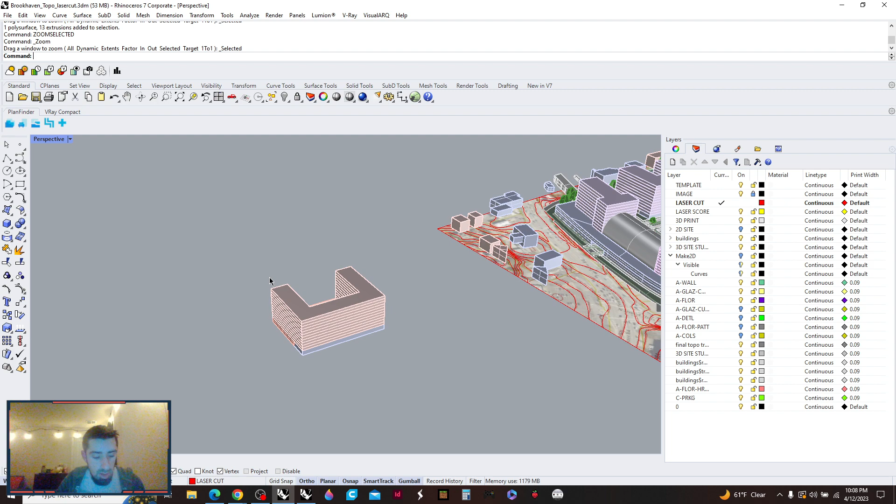First things first, we need to open up our Rhino file. I have a project I've been working on for studio this semester, and we're just going to use that. So we have this volume here, this project I'm working on. Let's say I want to 3D print one of these volumes. What we're going to do is copy it over and bring it here. Something people don't quite understand about 3D printing is that printers can't print on thin air.

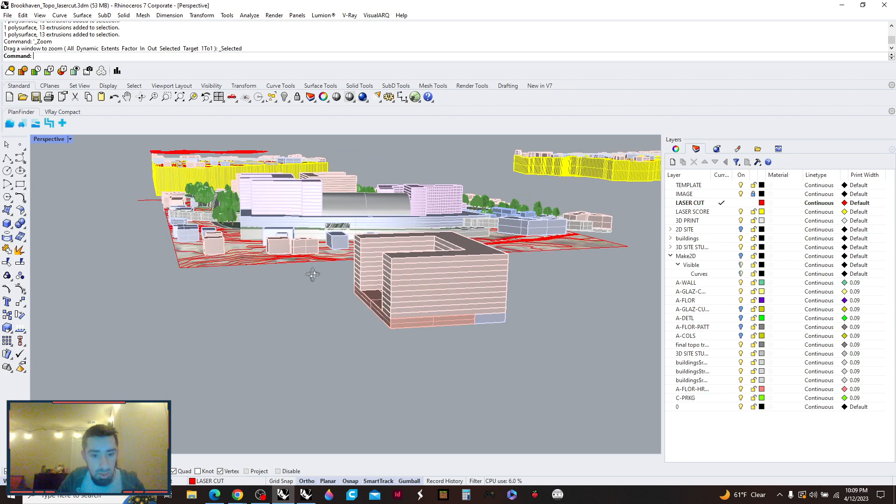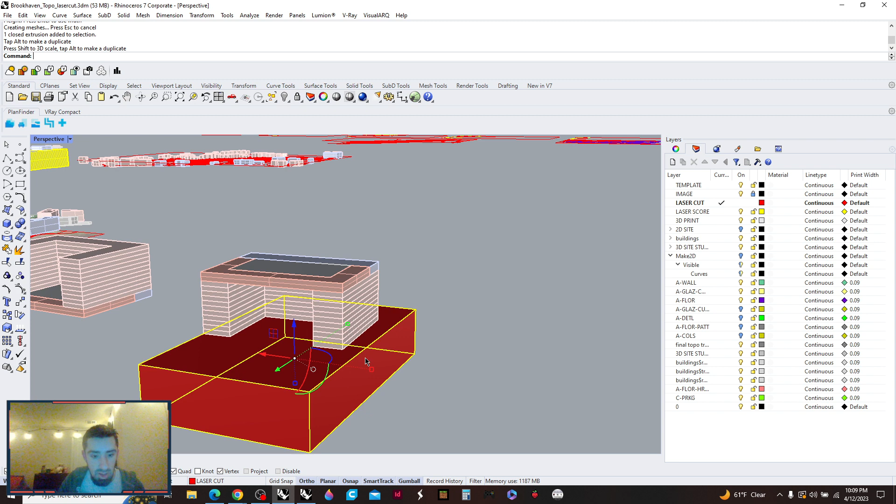As an example, say we copy this and rotate it real quick. Say we try to print it like this, with the print bed starting below this object. This would be a terrible way to print, because the 3D printer would start on the bottom layer, then have to print this top portion here, filling in a bunch of supports on the inside all the way up to the top, and then you'd have to take the supports out. Now the good thing is, supports you can take out fairly easily.

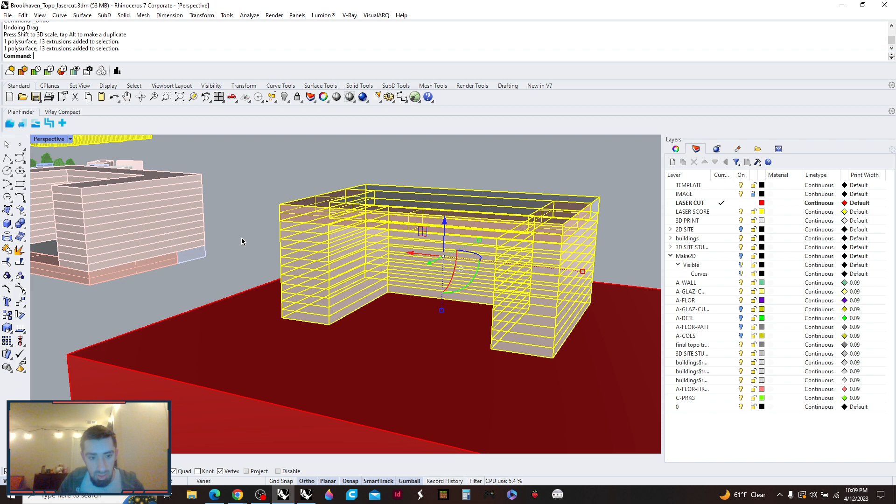The supports will be generated once we bring it into Cura, the slicer program. Most of the time, 9 times out of 10, you'll have supports in your project, but the idea is to get rid of or minimize the amount of supports in your model. So printing an object like this would be terrible, printing an object like this would be great.

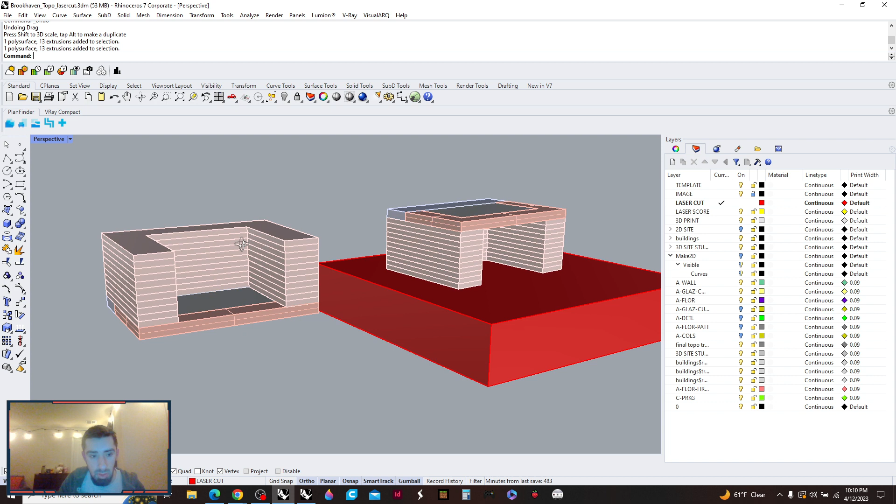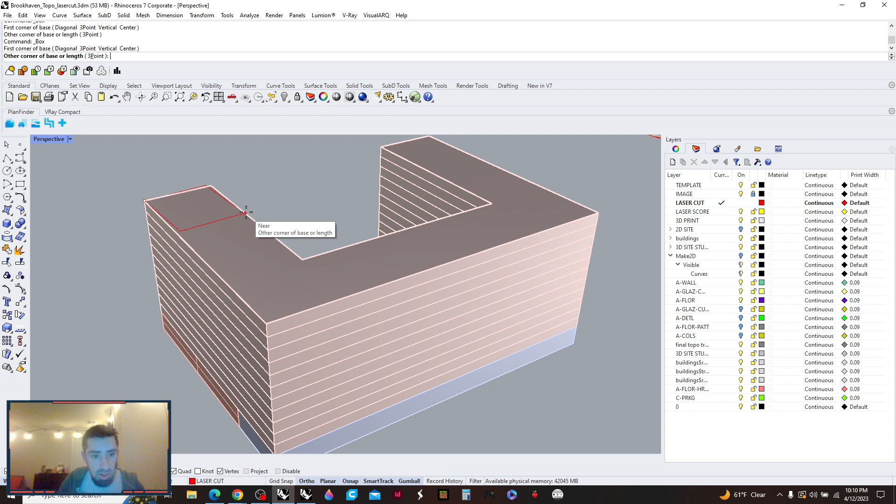The main reason this would be fantastic is because, believe it or not, this object wouldn't need supports at all. Now, it probably would need supports if we made a hole through this object and had a window or something going through it. So for this exercise, we'll go ahead and make a hole real quick, so I can show you guys what those supports would potentially look like inside of Cura.

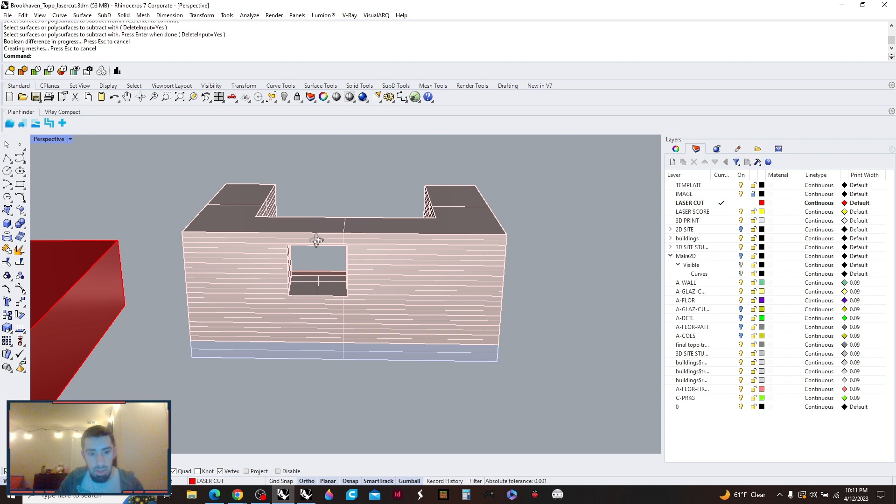So let's do this, and that's grouped, so we'll ungroup it. Then we'll make a hole. Now that we have our hole here, this could be treated as something that would need supports, like a window in our building.

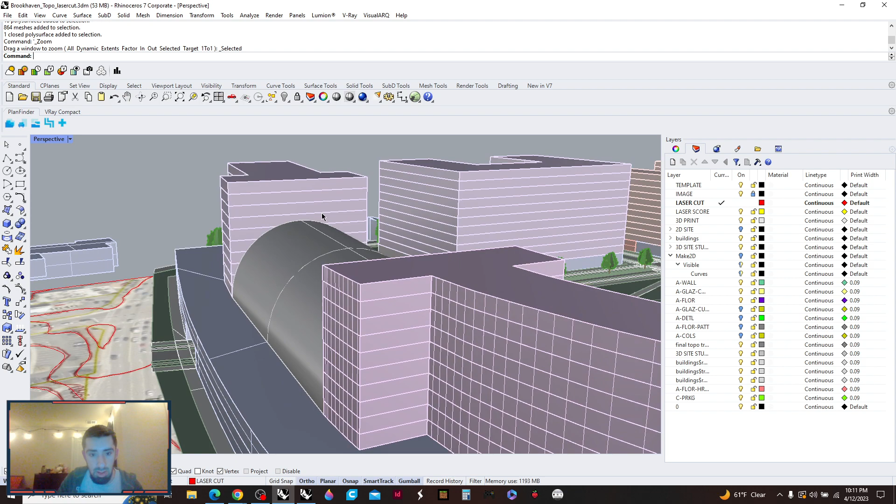Now, instead of printing your building at once, it might be smart to print it in multiple sections instead of all at once. For this exercise, for Decom 1, you guys all need to print one specific component of your building, which is the outer shell. So you don't have to worry about splitting your things up into multiple sections.

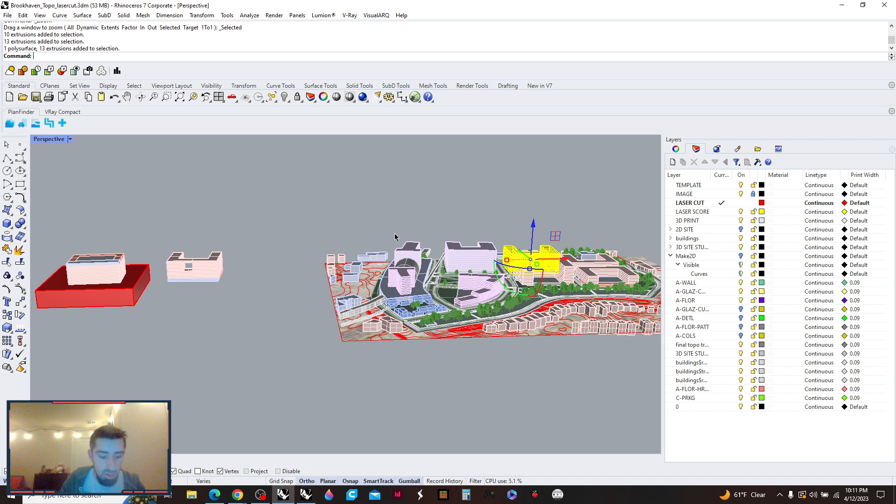The idea, however, would be to first start off with your original copy of your building, copying it over, and turning layers on and off depending on what you're going to actually use for 3D printing, or what you're going to use to laser cut, or for essentially any of your materials. So once again, say that was your original thing you wanted to completely make, then we would bring it over here and copy it.

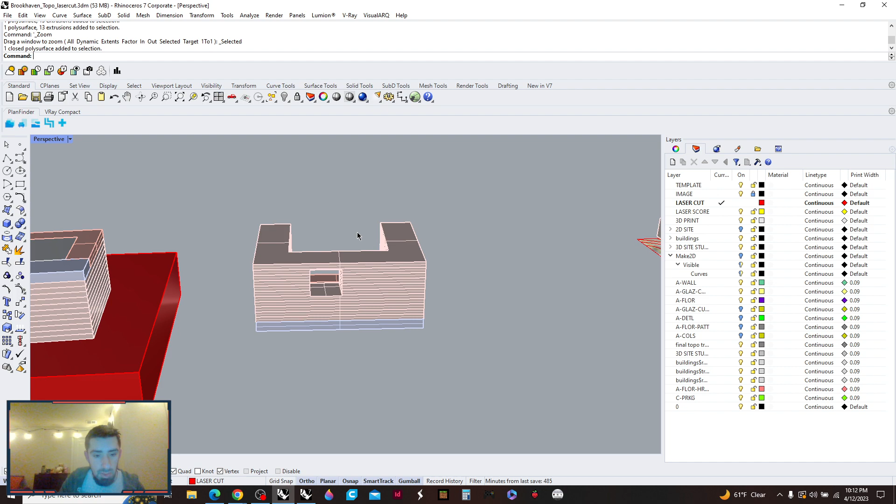Well, this version, we'd copy it, and then you turn off any of the layers you don't want. So for example, a lot of you guys have furniture, so you would turn off your furniture layer before copying it. Essentially what you would do is bring it over here and start working on the things that needed to be printed and the things that would be laser cut, and vice versa.

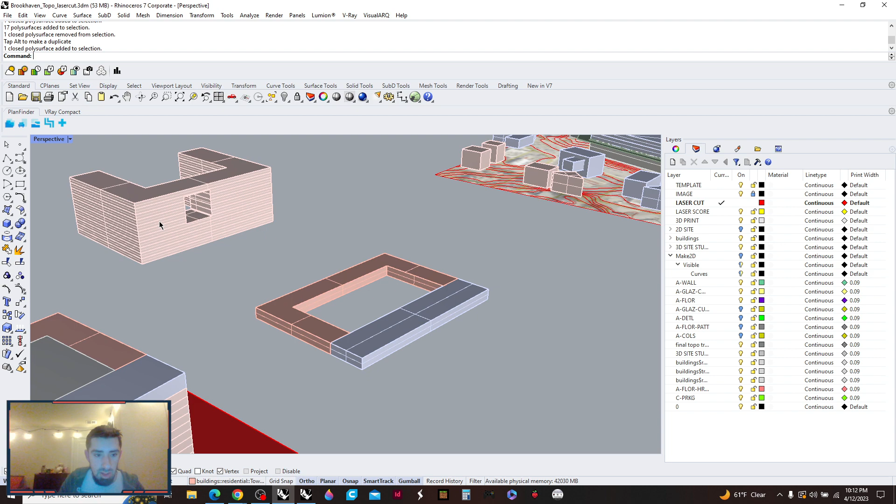So let's say we wanted to 3D print this section, but not the bottom. Then we would essentially just move this over. This portion would be 3D printed. Oh, that should be solid on the inside. Oh, there it is. Yep, accidentally moved it over.

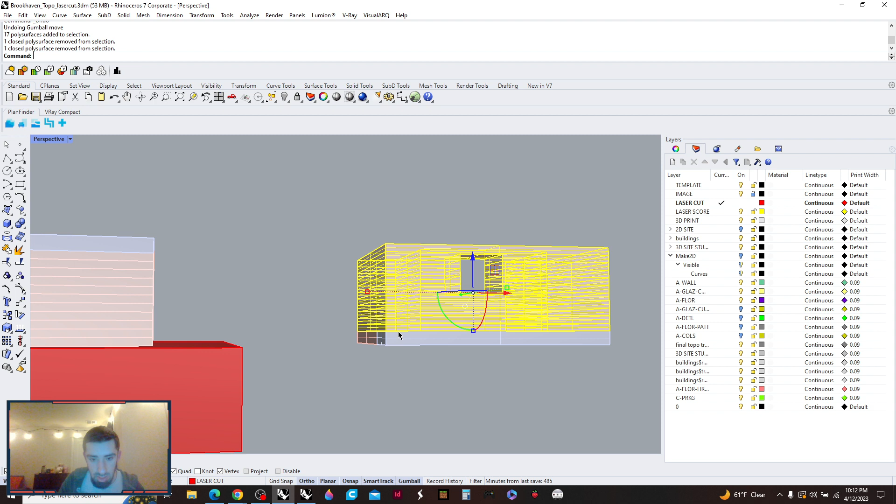So this portion, we could say, would be 3D printed, and then this portion we could say would be laser cut. Laser cutting we'll go over at a later date. So you would split it up into multiple chunks.

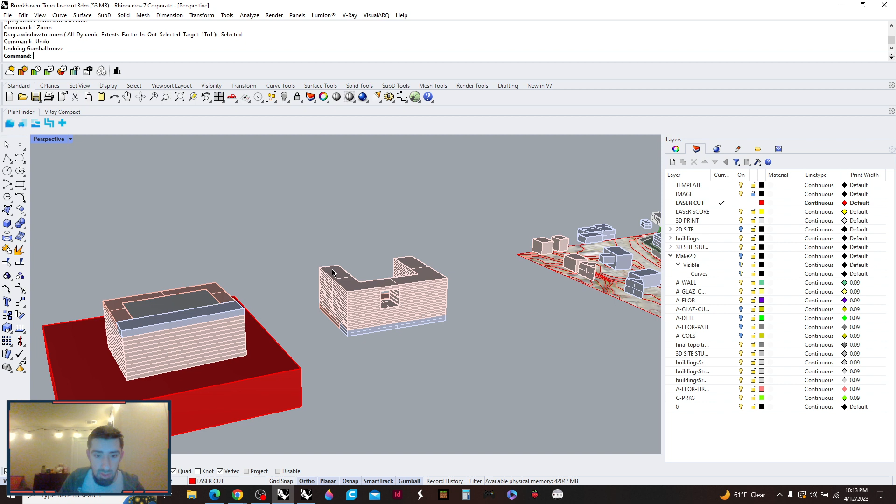So it's almost like you're making a list or a set of parts and an assembly kit, just pulling out things from your original model. So never actually move them—I would always just copy them, so you know what you've done already. So for this, we would copy this over, and that'd be, okay, great, that's going to be 3D printed.

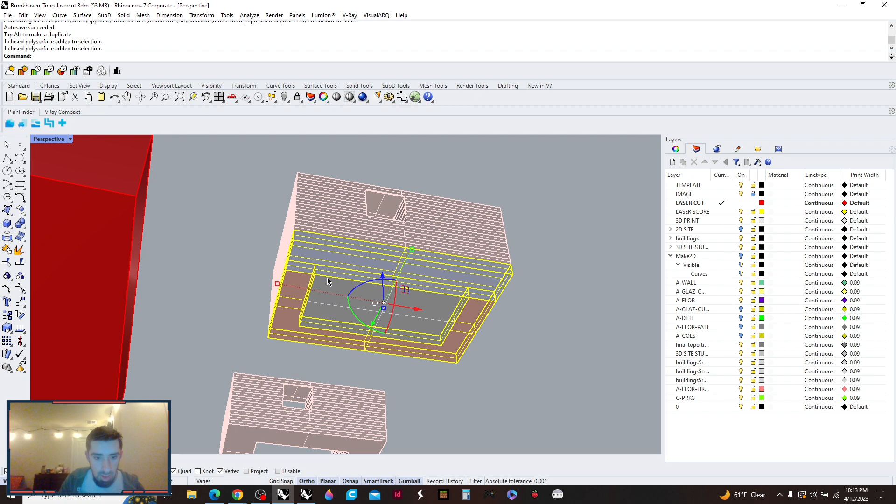And then you would do the same thing here, and we'd say okay, this is probably going to be laser cut. So you move that over there, and that would be laser cut. So then you'd prep this one for laser cutting and this one for 3D printing.

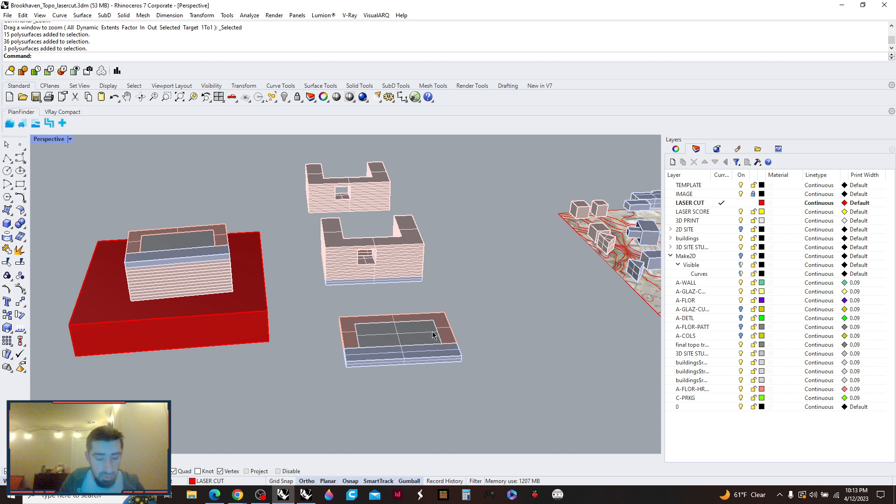So now, say you get all of this stuff ready—say you get this ready for laser cutting specifically. Now the next step would be to highlight each of your components that you would want, including your stuff that you're going to laser cut, and we need to scale it down to size.

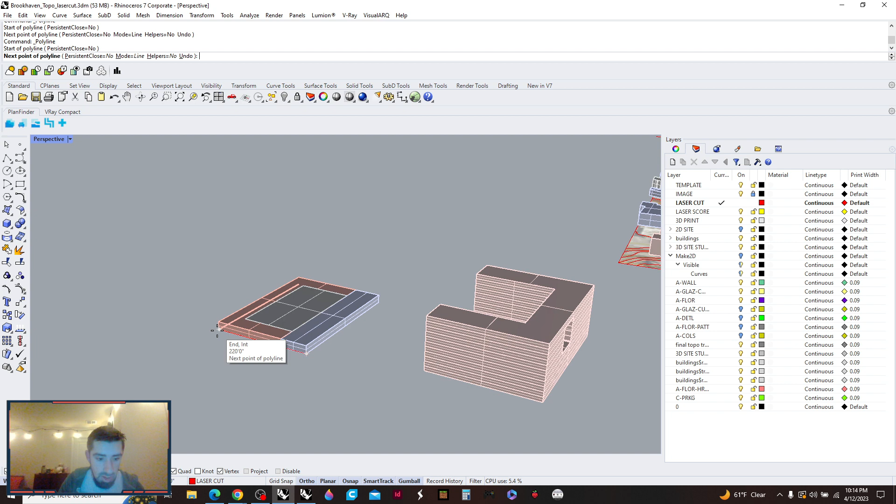Now this is 1-to-1 scale currently—see, it's in feet. So if we highlight this, this is however big my building is. I think it's like 300 feet by 220. So obviously you can't really print that.

So we're going to go to a top view, and then we're going to make a box, and make it 9 inches by 9 inches. It's all the way down there, really really tiny, so the easiest way to find it is to just highlight it.

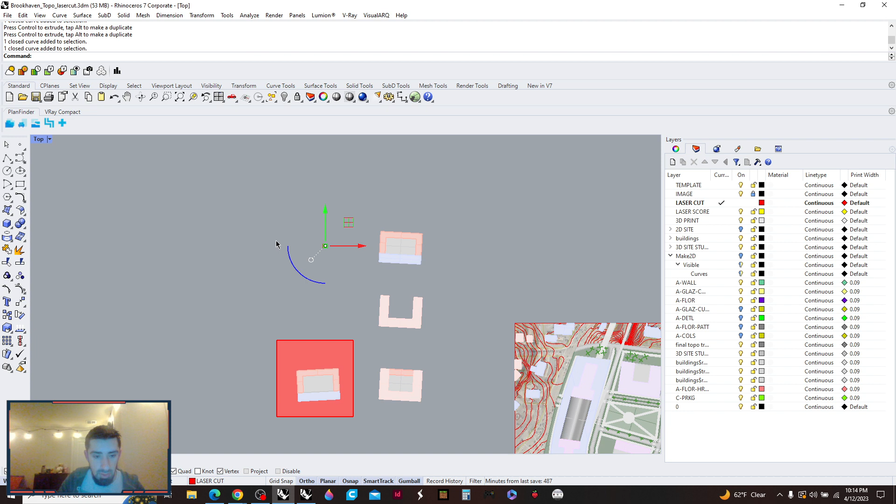And then we could do zoom selected, and now we're zoomed into it. So what we want to do next is make sure that these components are scaled down and can fit inside of this red box.

Now, I don't mean both of these components—I just want to make sure that at least the building fits, because this is the footprint of the building. So if this fits in, then that means this will also.

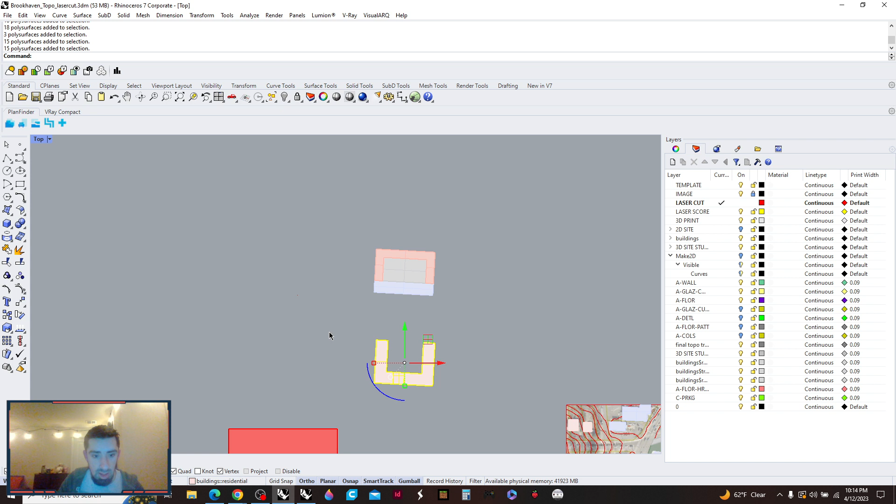So we're going to highlight this, type in scale. Now, the nice thing for this project is we don't need an actual scale—it can be kind of arbitrary. So we're just going to scale it down. It asks base point, enter for automatic.

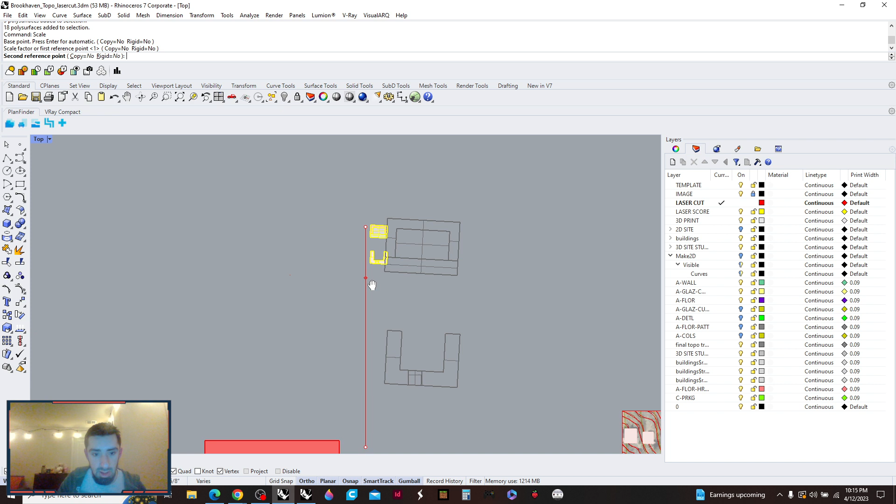We'll just click our base point here. Now, when it asks for a scale factor, basically we're just going to choose the length of the building, or just something longer than that, and we'll slowly drag it down essentially until it gets pretty dang tiny. So we have that, and now we have our plate over here.

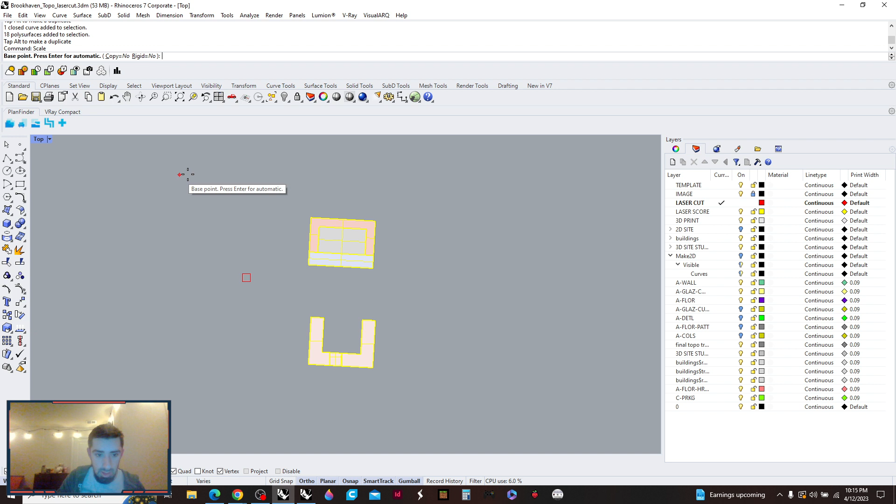So now you want to start moving this over using the gumball down to here. Look how much smaller that is now next to our base. So same thing, we'll scale it down again—keep scaling it, keep scaling it.

And the reason why we're doing 9 by 9 inches is because that's about the size of the bed plates for the laser cutter to handle. Now, on a typical exercise like this, if you were making this for a different studio project or something, you'd probably do an actual scale. So you would highlight this.

If it was the original scale, you'd type in scale, then choose the objects and choose a scale factor to scale from, like 1/32, 1/16, 1/64, anything like that essentially.

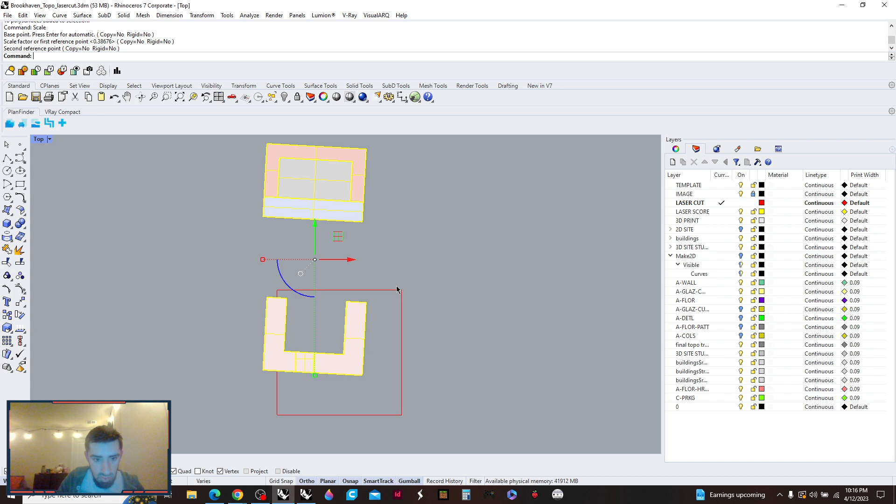So next up, what we're going to do is move this into here, and because we want to really make the most out of our model, we're probably going to scale it up a little bit to get it to fit nicely within that 9 by 9. So we have this.

So it looks like this actually isn't square perfectly. So what we're going to do next is actually rotate it. I'm going to move this over, and then I'm going to rotate it.

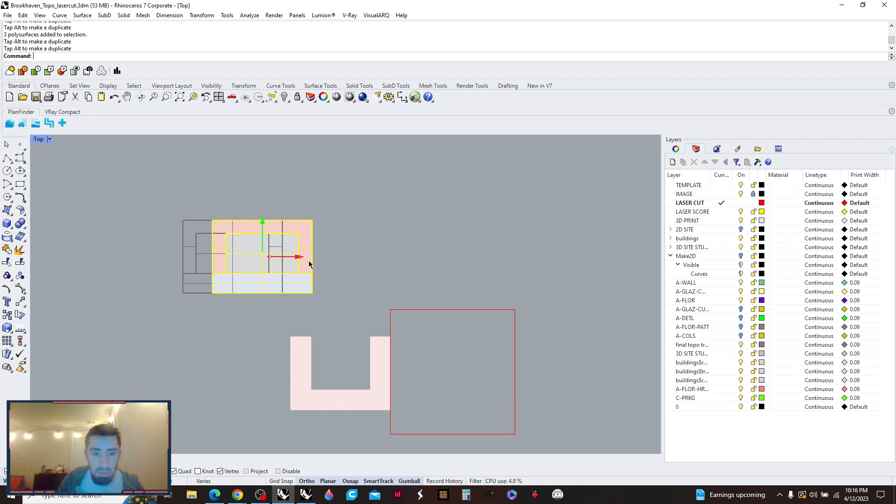The reason you'll probably want it to line up is the way the filament works. Think of it like a basic printer. Printers print things top to bottom, from the start of the page — you see the ink slowly printing out line by line. That's what 3D printers do, they print line by line. So since it's in a grid, it'd be best for your filament lines to all line up top to bottom and left to right, so everything's parallel with each other.

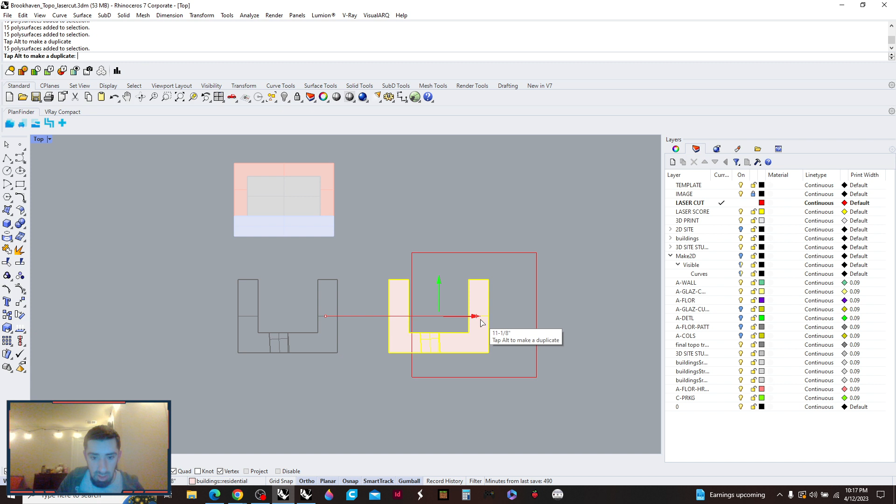So now that we have this, and this looks like a decent size, the next thing we're going to have to do is change this. Now we need to change our units, so we're going to right click on feet and go to unit settings, and change this from feet to millimeters.

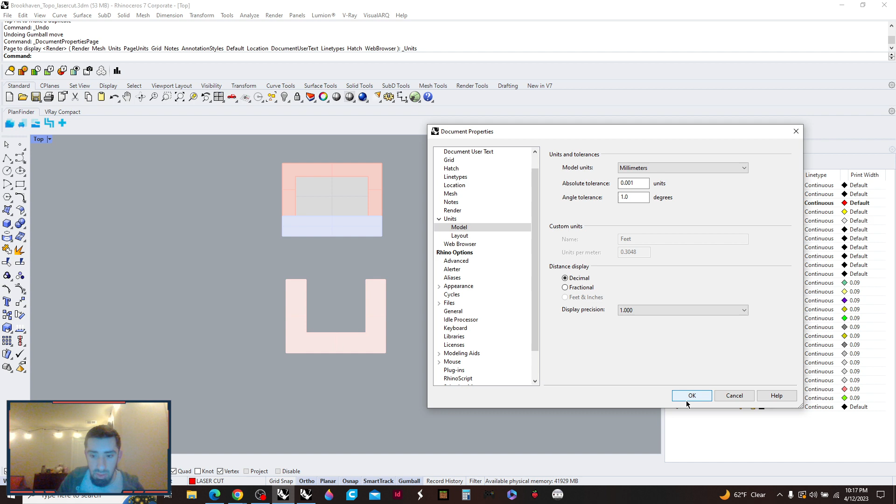The reason why is Cura, the slicer, only recognizes your model in millimeters for some reason. It's going to ask you to scale the model. We're going to click yes, just give it a second.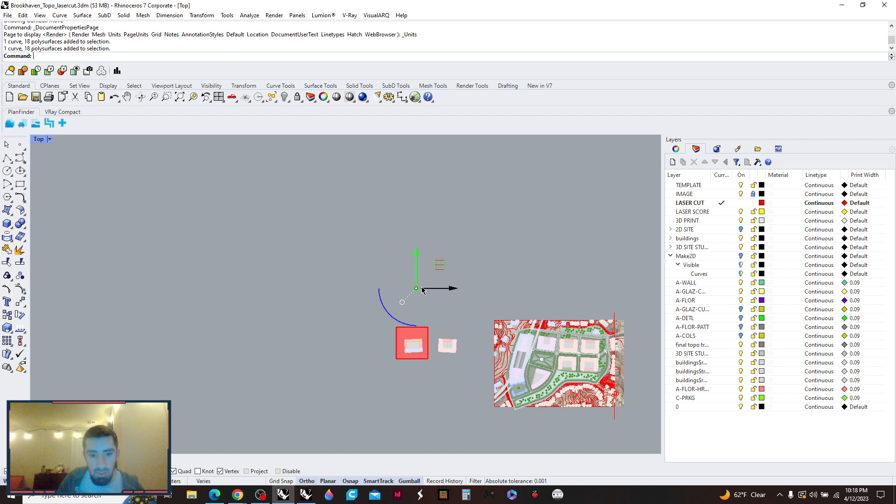Unfortunately it disappears sometimes, so we'll have to zoom it out. And there it is. An easier way to do that so it doesn't disappear is to keep your object selected before or after clicking the scale button — that way if you click zoom selected, it'll go right to it. So here it is in millimeters.

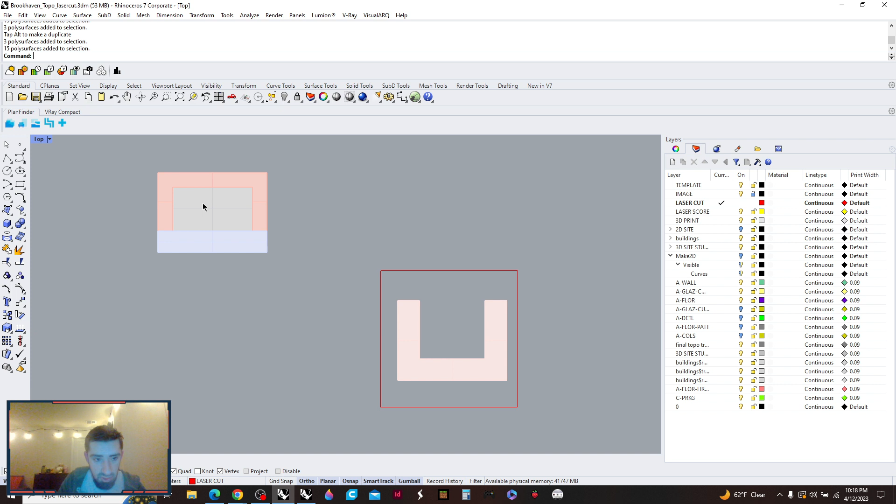So we're going to move this over here, and this is the portion we want to laser cut. We're not going to worry about this, but the good part is, since we want to make that for laser cutting, this and this are the same scale now, which means once we start assembling the laser cut portion of our model, it will be the same size as the 3D printed portion.

So make sure when you scale objects down for your model when assembling it, that it's all the same size. You don't want to scale one object down first that you're going to 3D print, and then later scale the part you're going to laser cut, because that would probably mess you up, honestly.

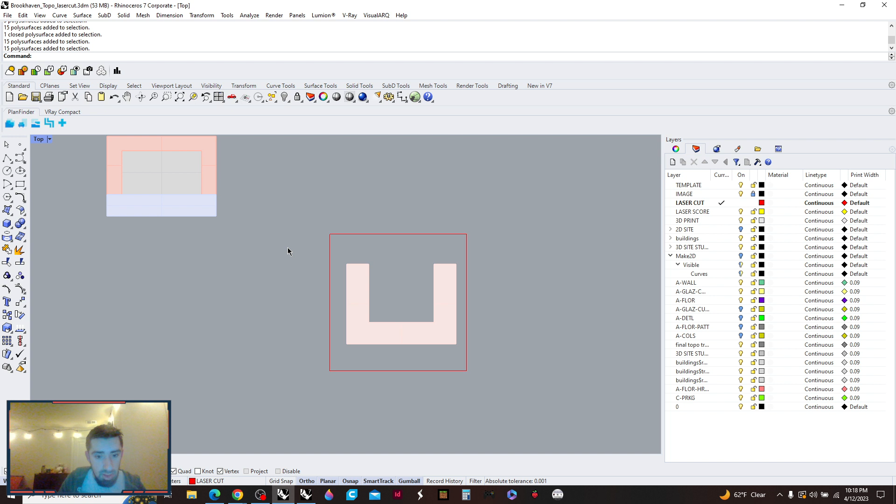So next up, what we're going to do is export this into something that Cura, the slicer we'll get into in a bit, will recognize. We're going to highlight this, not the line, since that was just used as a template for us, so we don't have to worry about it. We're going to type in export.

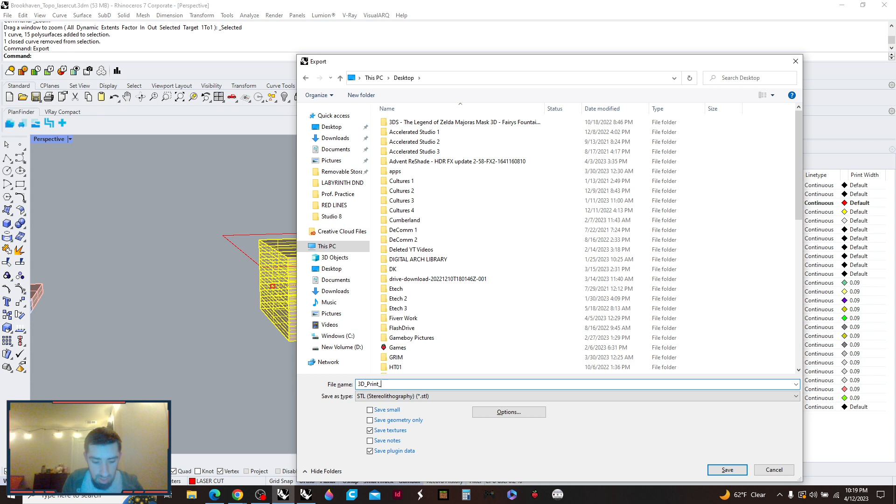Now it's going to ask you to export stuff down here — Rhino 7 3D model, 3DM. We don't want that; we want the file called STL, which is basically what Cura recognizes. I'm going to just save it to the desktop, and we'll call it test, or 3D print test. So we'll save that, then click save.

Now it's going to ask us here — it says the maximum distance between the original surface or solid and the polygon mesh created. Typically I just leave this alone; essentially that just means the amount of tolerance and things like that. We're just going to click OK. There's an option here between binary and ASCII — I don't know what the difference is, but typically binary is fine.

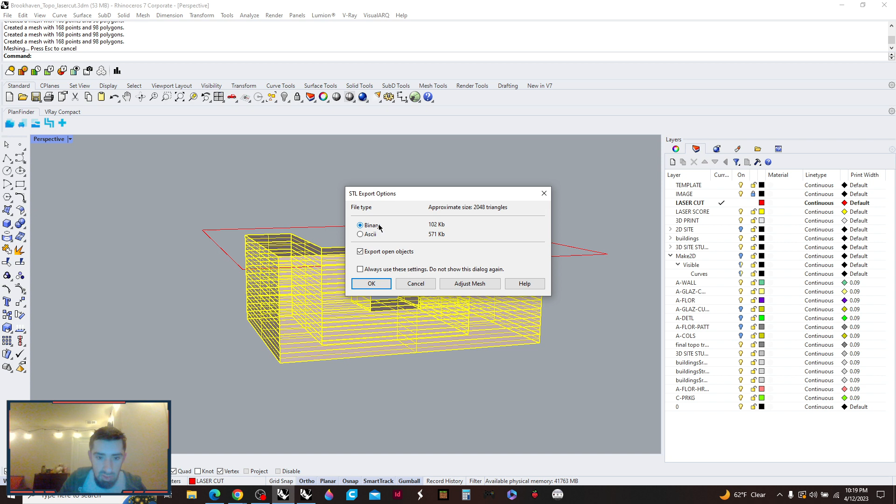Leave this as just whatever the typical is, and then we'll click OK. It saves really quick. It says file successfully saved as, and shows where it's saved.

Next we're going to go get the object. I'm going to highlight this, Control C, open up File Explorer, paste it into the command bar, show the desktop, and there it is. The cool thing is it's actually already recognizing it as something by Cura, so when I copy it into the command bar, believe it or not, it's going to open it up in Cura. And here it is right here, which is awesome.

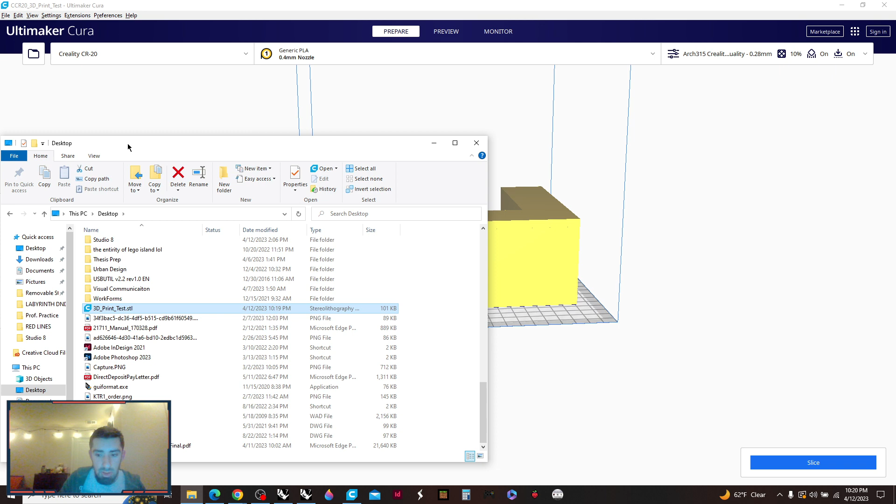Now for those of you that don't have these files automatically recognized by Cura, I'll show you what that'll look like. Say you have Cura just open, you'd go to open it first. Then you'd go to File Explorer, and we can just drag and drop it like so.

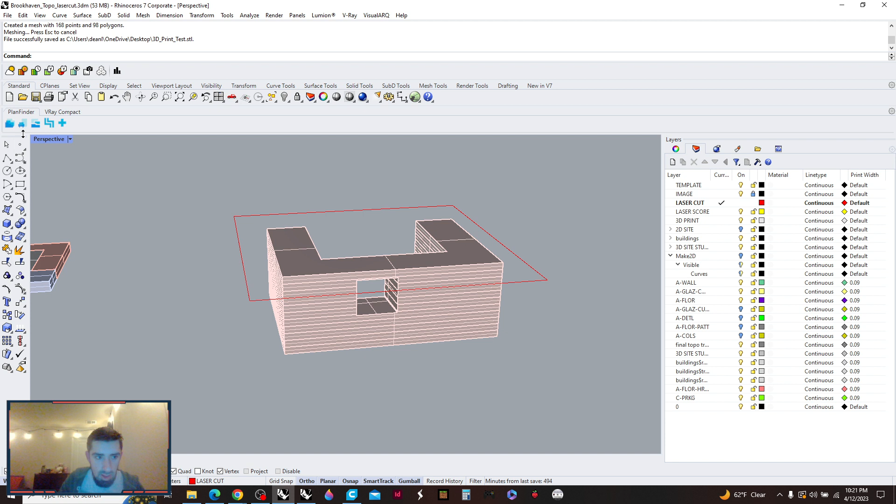And there we go. If we compare it to our Rhino file, we'll go ahead and look at it from a top-down view. It is the same exact size as the one from Cura, which is great, which means it's scaled properly.

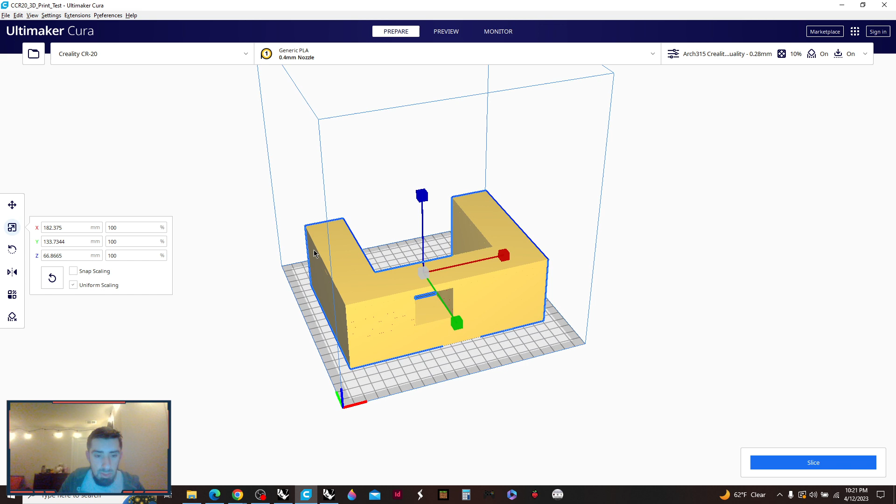Another way to tell is if you click on the object and go over to where it says scale, as long as it says 100%, that means your object hasn't changed whatsoever. Sometimes Cura will actually change the size of the object, and you need to be really careful of that, because if it's scaled to a different size than what you're laser cutting, your whole model is going to be screwed up, and you don't want that to happen.

So next up, we're going to go to our basic settings. Now, this is the part where if you don't have Cura currently installed yet and you didn't follow the instructions I showed at the beginning of this video, you're probably going to want to pause and do that, because these settings and presets won't actually appear for you until you do that on their website. So make sure you get that done first.

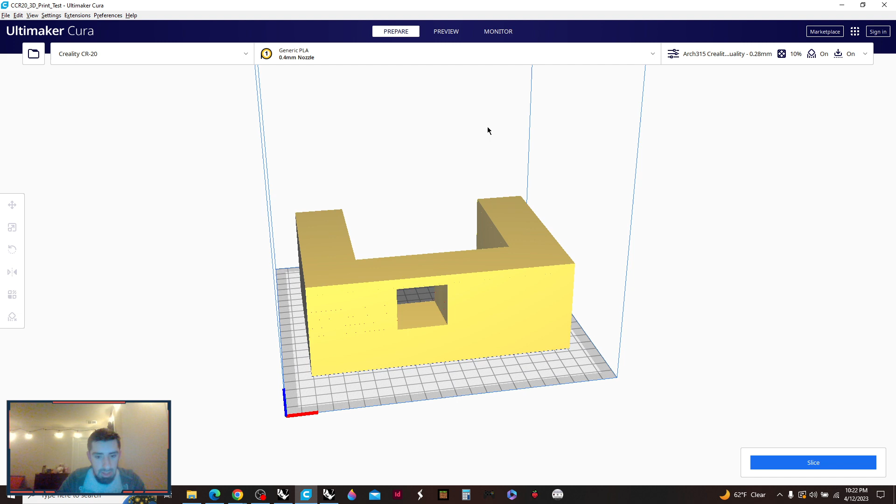Assuming you have that done, we're going to click on this one right here, which is Creality CR20. These two you probably won't see — those are my personal printers — but you'll see either this one or the Ultimaker S3. Typically we can leave it on the Crealities because that's the most amount of printers the school has. I think they have like 10, a decent amount of them, so that's the one we'll leave it on.

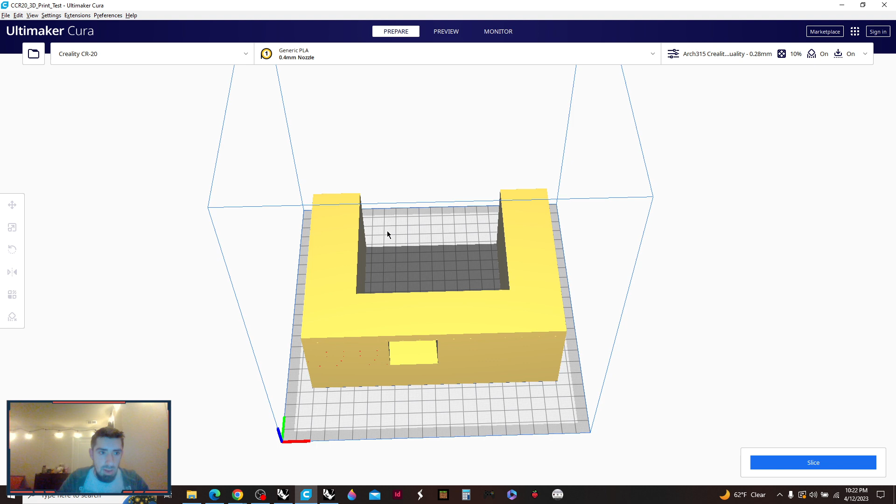Next we'll go over to here. You don't need to look at any of that stuff because that's all your detailed stuff. Typically we can look at just the default. So if we go to... actually, no, we do need to look at that, my bad.

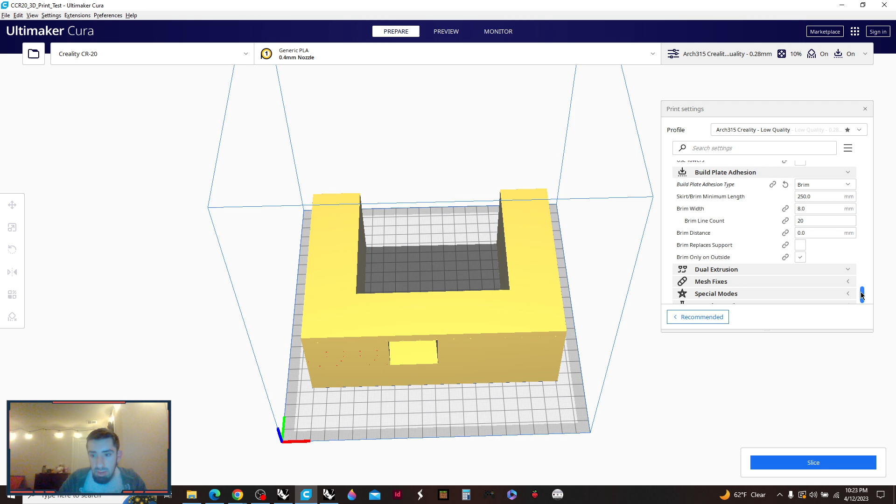So if we click this over here, these are our presets, and then we go to custom, and see where it says profile. If we click on this, there are 3 different profiles that the school has set up: standard quality, high quality, and low quality. They've already changed all these presets if we scroll through, and you aren't typically going to want to change these at all, unless you have a massive print like this — then you might want to change stuff like this, and I'll explain a bit of that to help you out in the future.

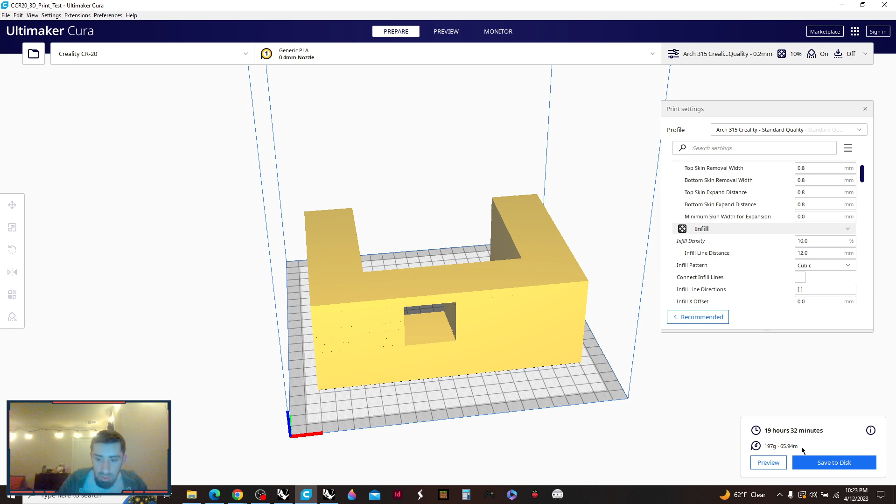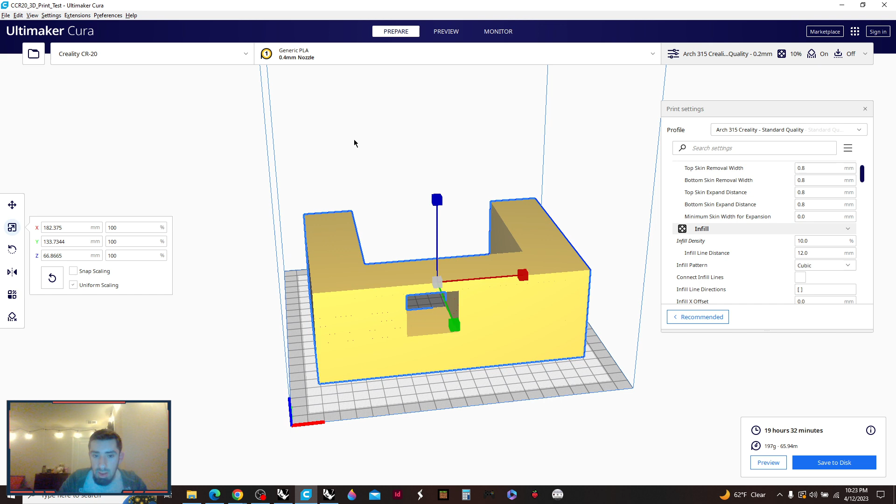Before we do that, we can start tweaking settings depending on what we're fine with. So the first thing we're going to do is go to preview at the top. Preview will show you exactly where different things are going to be, and it color codes it. I forgot what the color code is off the top of my head, but I know the blue represents the portion the printer starts out with.

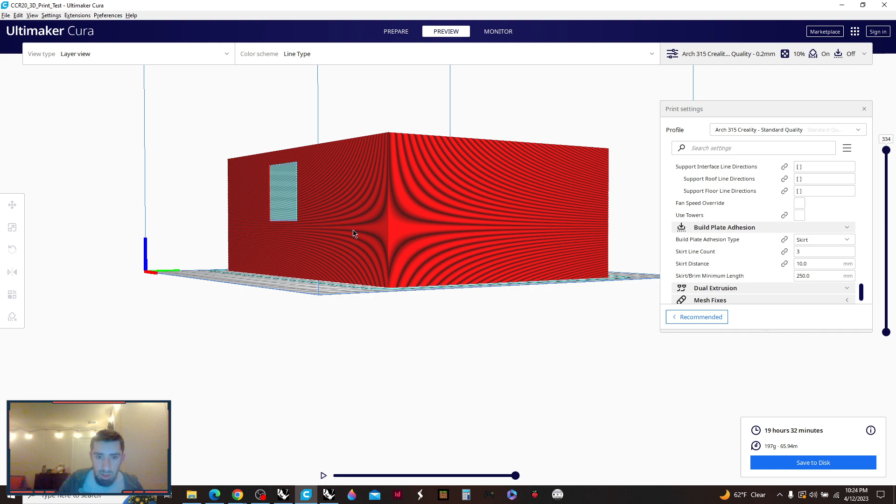This surrounding is called a skirt. If we scroll down on the side, below support, we find build plate adhesion type: skirt. Typically for a smaller object with a smaller floor plate, say it's very small and gets bigger as it goes up, like a cone, then you'd probably want a brim or a raft.

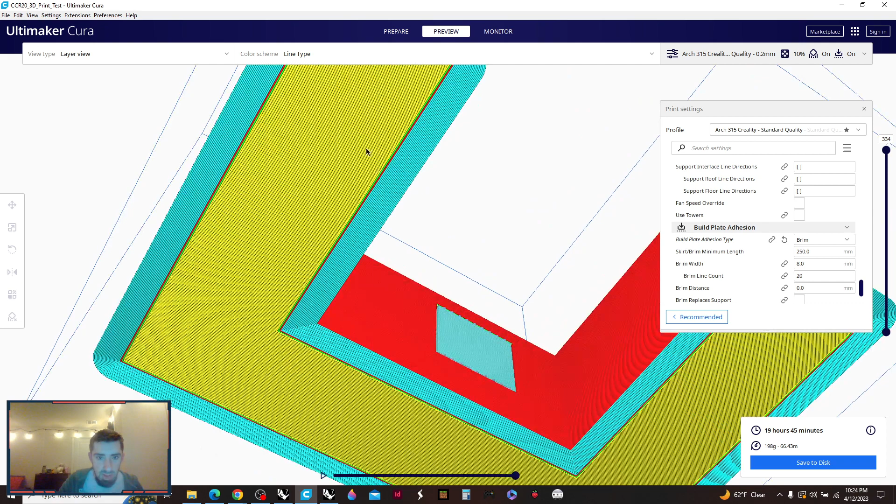Now if we click brim and then slice, watch what happens. The brim actually makes a border around the shape, like it's holding it in place, and it locks it in place. The yellow represents the bottom of our object itself, and the blue portion goes right up to the edge of our object.

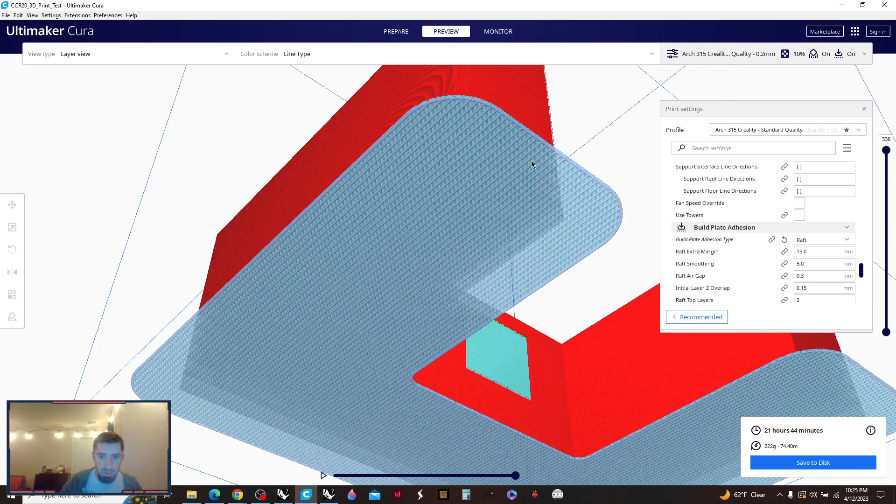Now let's change it again to raft this time, and we'll slice that. Raft obviously takes a lot longer, 21 hours. The reason why is because if we look underneath, look at that — see, hence the name raft. It literally prints a massive raft, a massive portion of filament, a couple of layers for the object to sit on. A raft would be beneficial if you're having trouble with your print sticking to the bed.

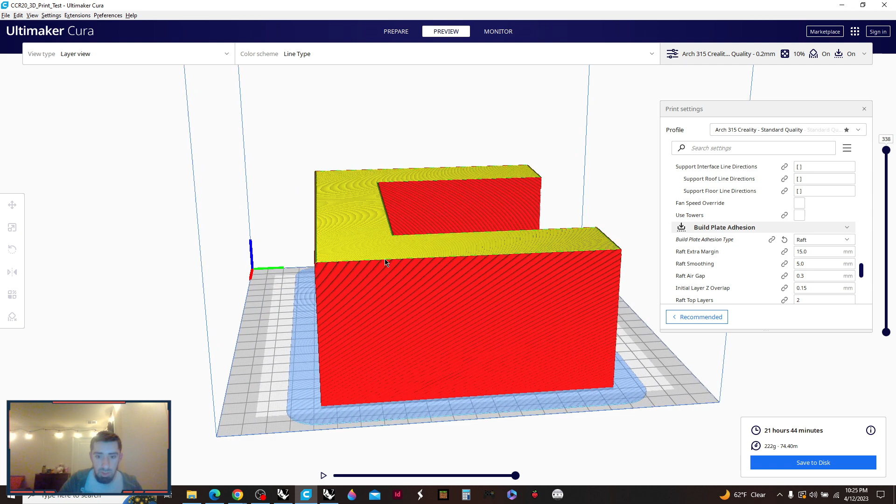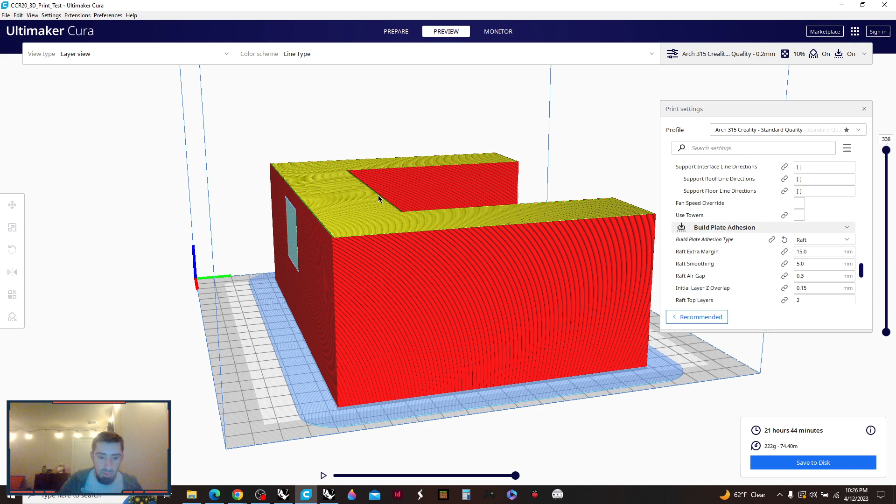You guys won't directly have those issues because the people in the workshop will be manning the 3D printers. But to save you time from failed prints, one thing you can do is increase your bed adhesion by changing this to a raft or a brim. Keep in mind, the only time you'd really have to use one of these is if you have an object that's very, very small surface-area-wise at the bottom and gets bigger up towards the top. That's essentially the only time you need it.

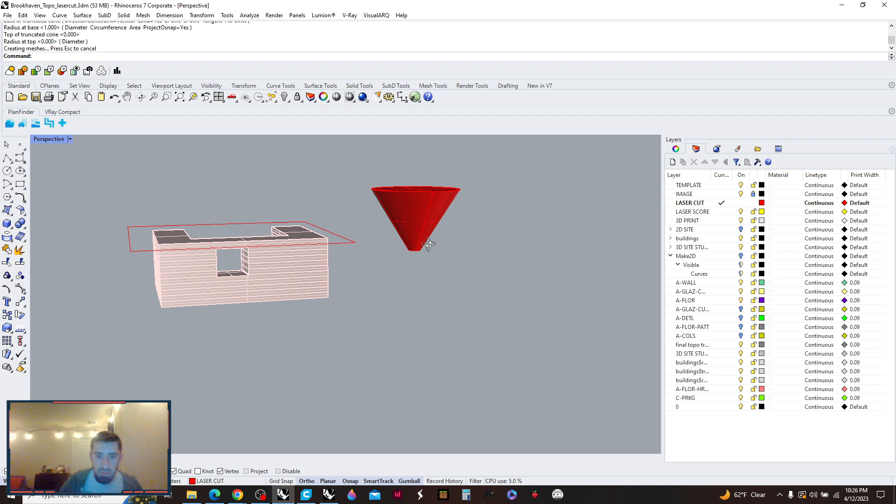As an example, let's go back to Rhino. We'll just make a cone — essentially very tiny at the bottom, tall, and really wide at the top. If you made an object like this on the 3D printer, you would definitely want a raft or a brim at the bottom to hold it in place, because imagine the 3D printer trying to print all of this.

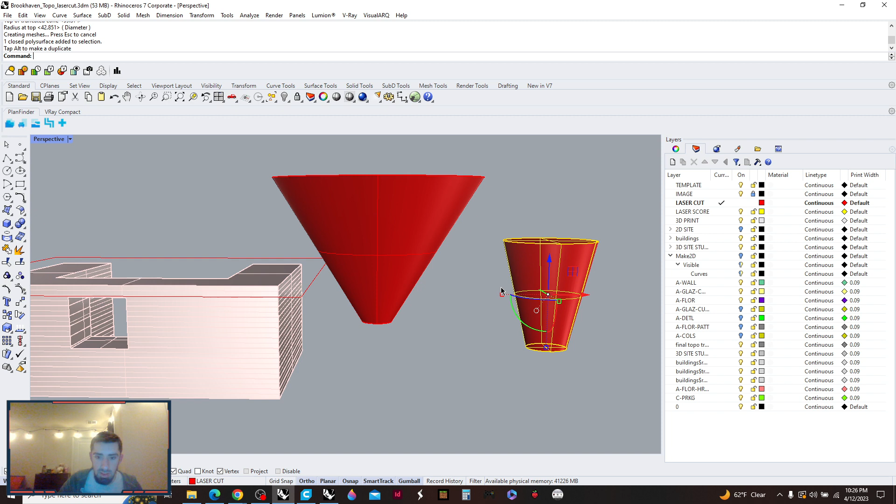Depending on how steep this is, it might actually make supports here, but if we made another one, it might not make supports if it's a little bit lighter, like that. You just have to be aware of what you think the printer will probably make supports on. It'll probably definitely make supports on this, but probably won't with a grade that's not as steep. So we'll go back into Cura.

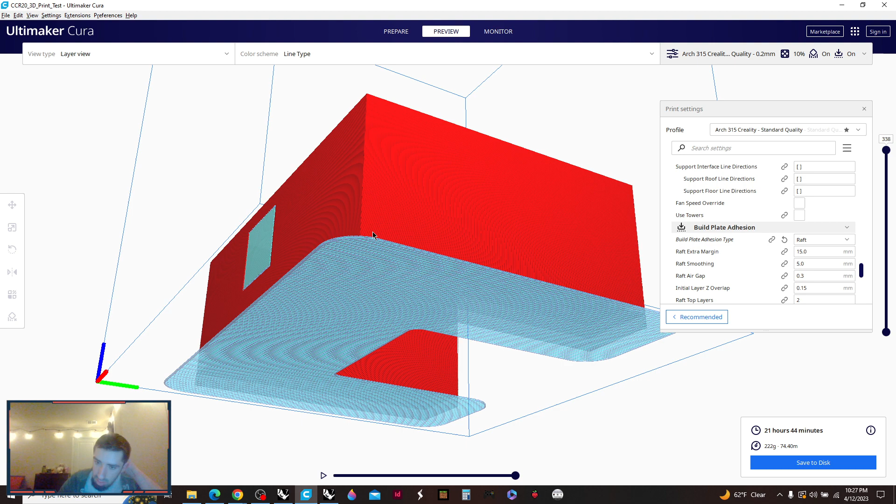So that's essentially how skirts, brims, and rafts work. For you guys though, you'll probably only have to use either a skirt or a brim. For this object right here, we're going to use a skirt because it has a massive amount of floor space, so we don't have to worry about that at all.

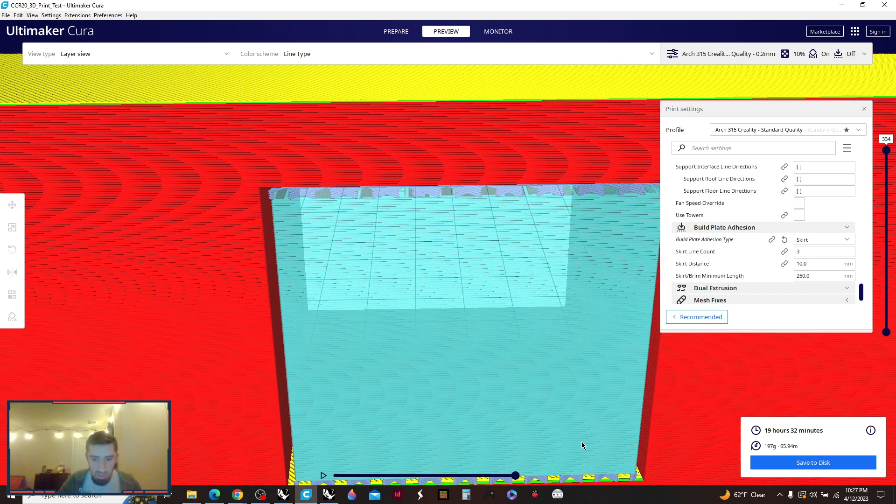The next part we'll look at is the supports I was talking about earlier. See that hole we made inside of our object? All of that is going to be supports — see these tiny X's right here? Basically, the 3D printer recognizes that it actually has to build supports because it can't just print on thin air.

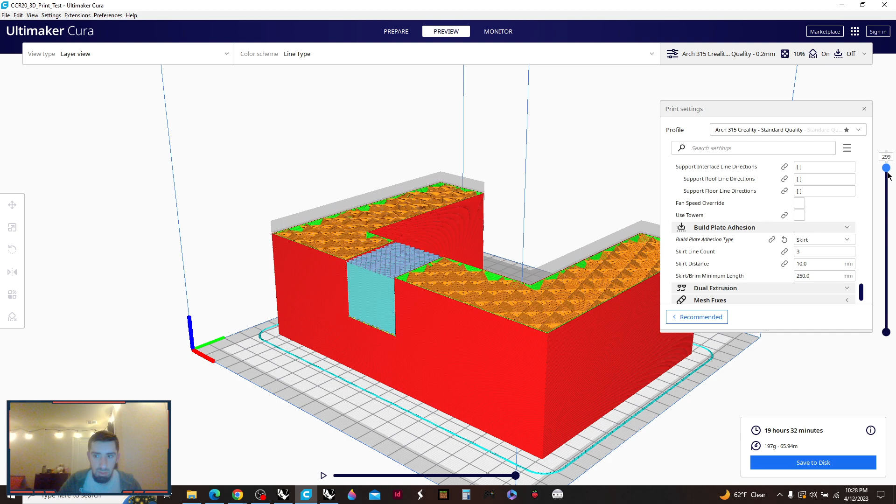So we're actually going to go over to this column, this number 334 — that's the amount of layers it'll go through. If we just drag this down, you can actually see what each layer essentially looks like. So here's what the very first layer would look like when the 3D printer's nozzle starts moving.

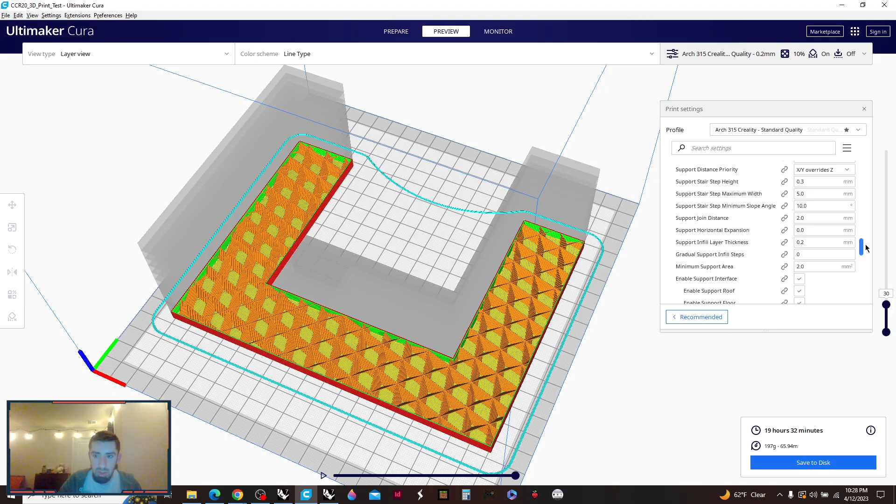And here's what it starts looking like later on, and you can actually see the inside. This is called the infill. You can actually turn this down depending on your object. Typically it's good to change the infill for a bigger object like this, and honestly, for an object this big, I definitely don't need this dense of an infill.

So we're going to scroll up to infill right here and infill density. The only thing you need to change if you wanted to would be infill density. So we'll change this down to 5%, and now we'll click slice, and let's take a look at what happens to the infill on the inside.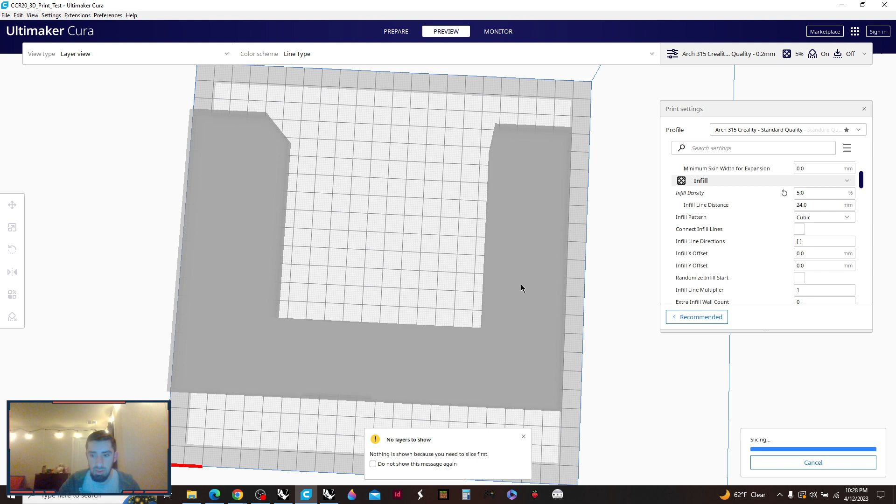Well, look at that. The pattern's way, way bigger. And see how it takes a slightly shorter period of time? That's fantastic. So essentially, if I were to open this up, it would be these hollow hexagons right here. And you can actually change the pattern too.

But I won't worry about any of this stuff for this right now until a little bit later on, once you guys start 3D printing a little bit more.

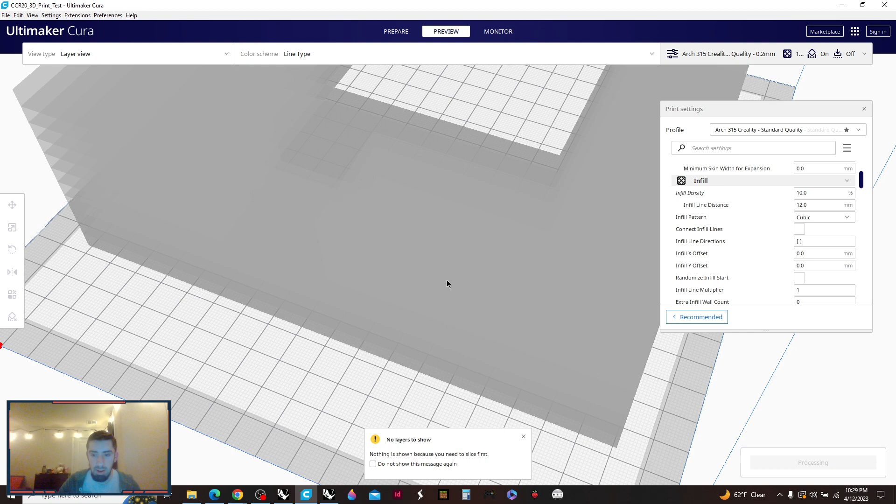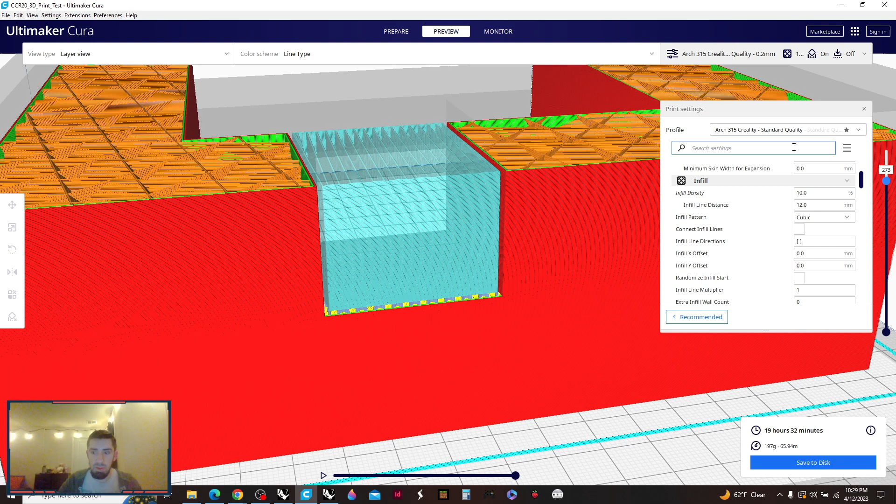So we'll scrub this up a little bit to take a look. Now we're getting to the overhang for this opening or window, whatever it is. And that is made out of these supports, right? It's made out of the same exact material, but the nice thing is it makes these X's at the bottom, and if we scrub all the way up, it makes these at the top too. Essentially, it just makes it really, really easy for you to get rid of these supports.

Now, they also have printers that have soluble material. And essentially what that does is, say you have something with a crap ton of holes in it and it's just way too much supports, but you need to get it printed.

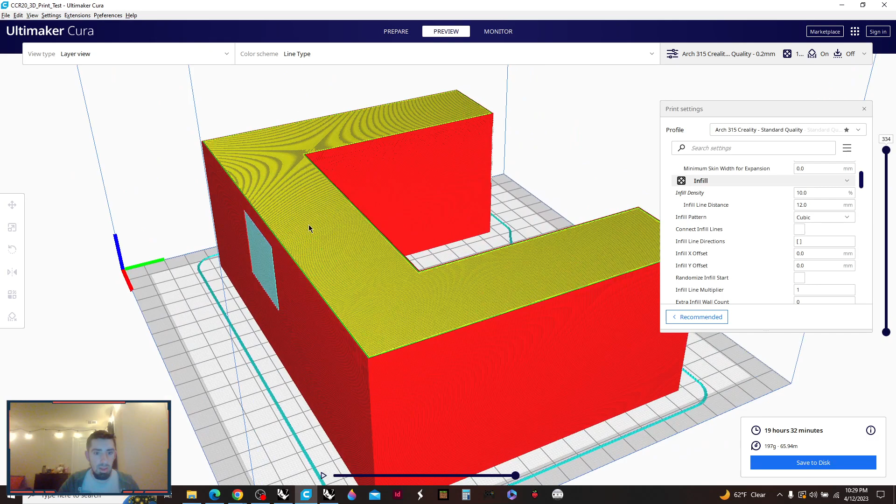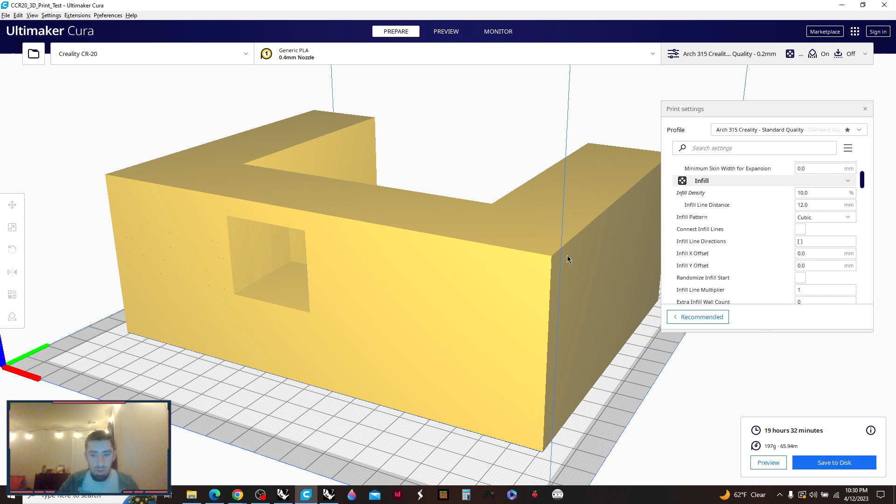So typically what you could do is you could actually change this on the printer if we go back to prepare. I don't have the preset for it. I think it was back when the school wasn't doing this, but essentially there would be a preset for a printer and a new standard that allows you to have soluble. And you would just switch it to that if you needed more supports. Once again, for this project, you guys aren't going to need that at all, so don't worry about that right now.

Anyway, so for this exercise, we'll do standard quality. We made sure it was a skirt, and we'll go to preview. You can click preview here or up here, so wherever, it doesn't really matter.

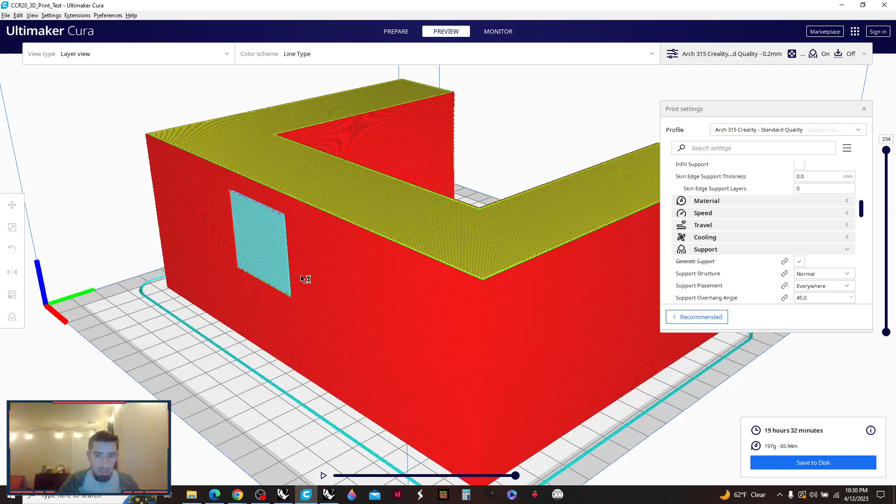And once you're happy with it, then what we'll do is we'll click save to disk, and then we'll save it as whatever we want to call it. So it says the printer name first, and then the name of your object, which is what we call 3D print test. So we'll just go ahead and save this to the desktop.

Looks like it's saved. We'll open the folder that it's at. It's right here. There it is.

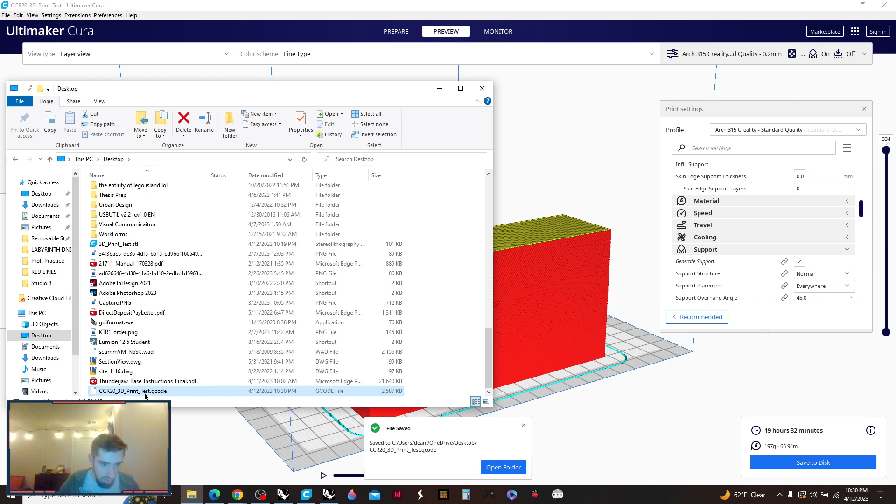So now we'll go back to Google, and we'll go to 3D, not 3D Warehouse, 3D, there it is, 3D Printer OS. So the school stuff.

So essentially, these are previous projects that I've done. I haven't really deleted them, they're just still here. And there's also these ducks, right? They also have that stuff. Those just stay there. Essentially, what we want to go to is add files.

It'll ask to drag and drop to upload content. So let's click our folder. There's the object. We'll drag it here, and then it'll upload. So essentially, we can wait for it to upload.

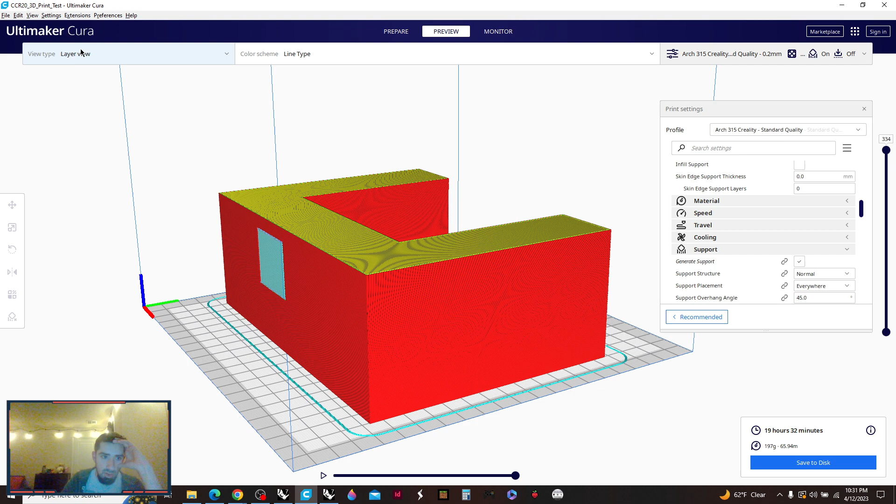And it'll ask us to select the printer type here. So Creality Ender 3. Let's see, where we sliced it in, let's go back to prepare to take a look. It was in the Creality CR20.

Typically stuff like that doesn't matter as much, but let's see, that's the CR10 series. The Creality Ender 3s are the CR20s, I'm pretty sure.

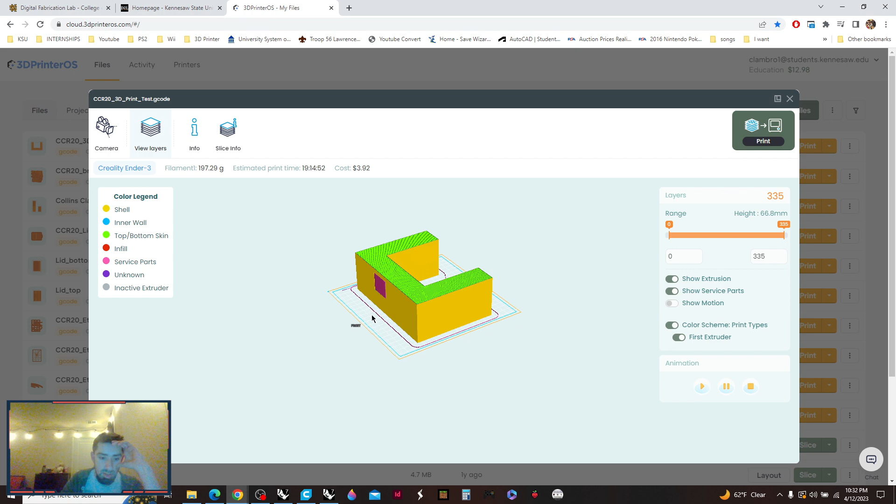So then you can click save, and it'll load. And then once you're ready, you can click preview. The cool thing is this preview actually comes up and looks similar to the area in Cura.

The interesting thing is you can actually upload STLs here and slice them in this software, although I know at the school they were telling us not to do that. So make sure you're slicing in Cura and getting that G-code file from Cura specifically before uploading it to 3DPrinterOS.

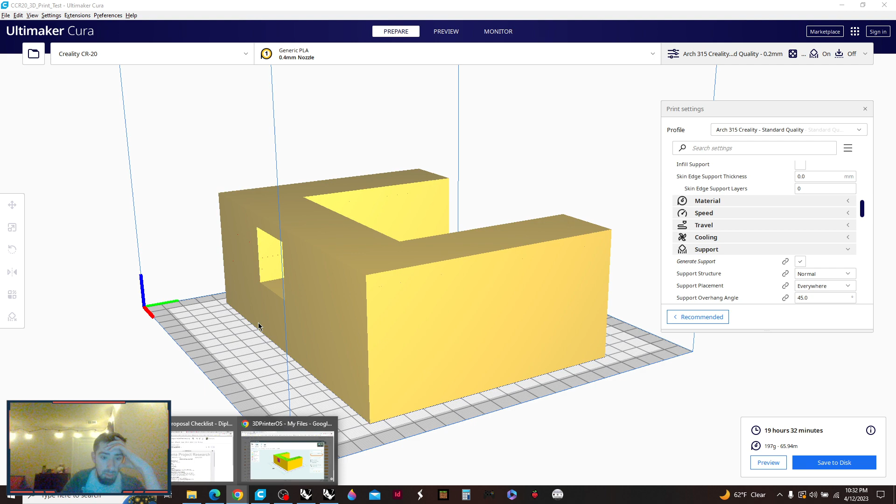But essentially, you could open this up, just preview it, make sure everything's okay, and it looks like they have the color legend here. So infill, that's the stuff in the middle, right?

So if we move that down, there we go. Now we can see it. Inner wall, there's the interior. Service parts, that would be the support, right? That's what the support essentially looks like.

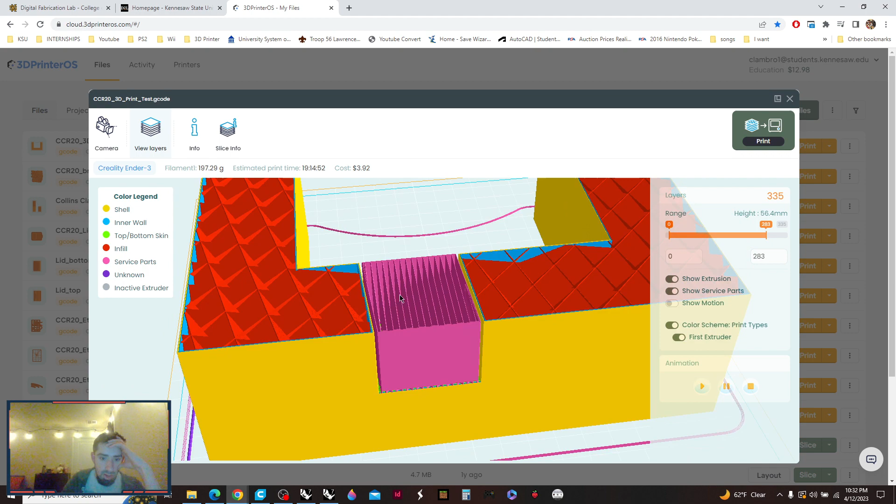So this actually comes up better here in this software. Let's see, unknown, that is interesting. So when artifacts like that come up, typically they won't print, so we're not going to worry about that. Shell exterior, and that's about all you would need.

So we're going to click the X button now that we previewed it and made sure that it fits and is inside of the bed, and it'll show you how much it costs here. That's how much I have left, and it shows you the preview of how much it'll cost.

But there would typically be some that would be green, right? A green icon means open. So you would want to either click on the one that's open and has enough filament for your project, or you would just queue up behind one that's almost done.

So essentially what you'd want to look at here is how much filament your object takes. My object is 197.29 grams of PLA material.

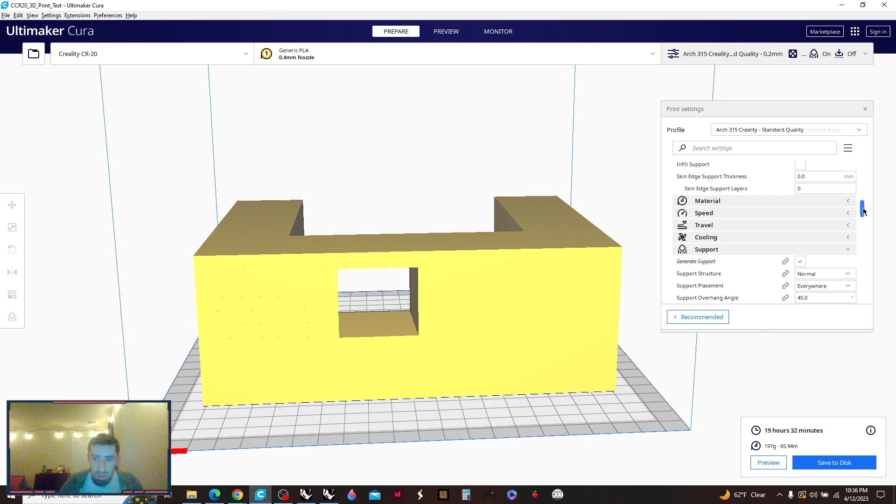For the farm that we have set up. So after that, then you would want to make sure that you want to get it printed, and I think that covers it. So yeah, I'm pretty sure that's about it.